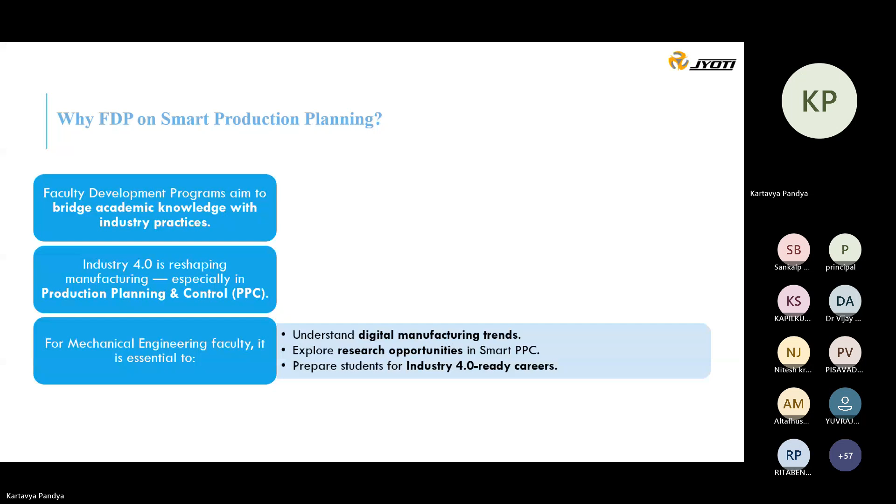Let us go to the basics. Everybody has information around what Industry 4.0 is. No need to explain much more, but it's the fourth industrial revolution. The diagram shows us different tools and techniques: IoT, cybersecurity, virtual reality, big data, autonomous robots, additive manufacturing, simulation, system integration, and cloud computing.

Think of a smartphone. It is connected to a cloud, apps, GPS, and sensors. Similarly, a smart factory connects with CNC machines, ERP, and IoT devices. Industry 4.0 aims to combine physical manufacturing with digital intelligence.

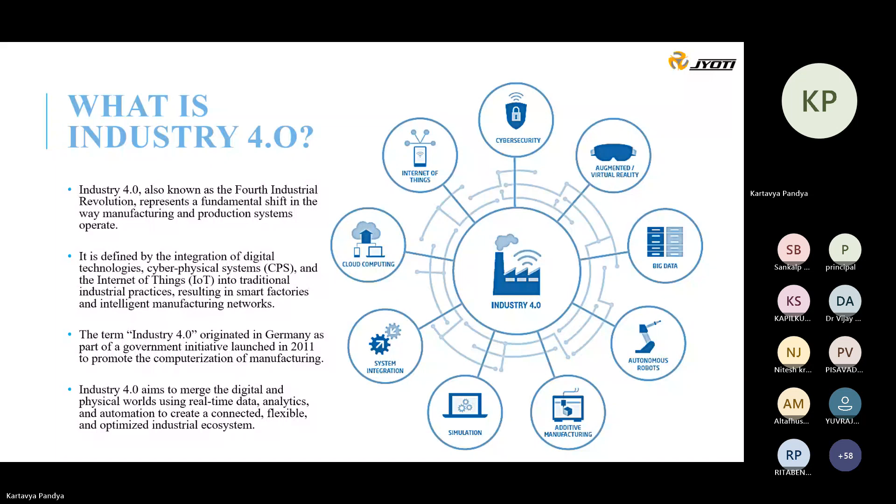Let us see something in detail. The image in front of you shows us so many things. It's an evolutionary history of industrialization and machine tools. Here we can see Industry 1.0, Industry 2.0, Industry 3.0, and 4.0. The late 18th century is the first revolution: the introduction of mechanical production facilities supported by water and steam power.

The second industrial revolution is mass production with the help of electrical power. The third revolution combines IT and electronics, allowing further automation of production processes. And nowadays, the fourth industrial revolution: connected enterprise, connected production facilities, and the Internet of Things.

As industries grow, machine tools also grow. With Industry 1.0, there was machine tool 1.0: machines were mechanically driven, manually operated. The next phase is machine tool 2.0: machines are electronically driven and numerically controlled. Then we get machine tool 3.0, CNC machine manufacturing around 1980. And nowadays we have machine tools 4.0, cyber physical machine tools, cloud based solutions.

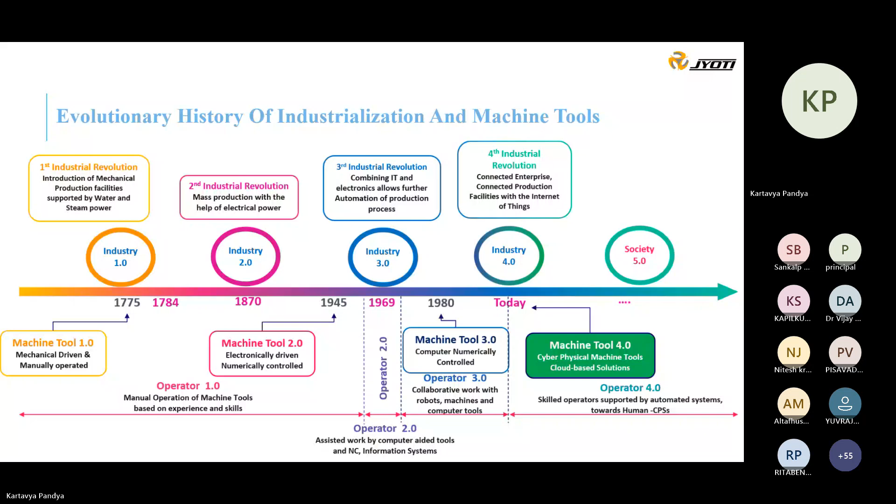Let us move to basics of production planning and control. Production planning and control refers to two separate production stages: production planning and production control. It's the process of managing resources, manpower, schedules, and other aspects of producing goods. Production planning and control is implemented by businesses to further strengthen their production processes and prevent setbacks from affecting their normal operations.

Production planning and control is mainly divided into these 8 steps that we can see on the screen: planning, routing, scheduling, loading, dispatching, expediting, inspection, and correction. Planning decides what to produce, when, and how. And control means whether it's happening as per plan or not.

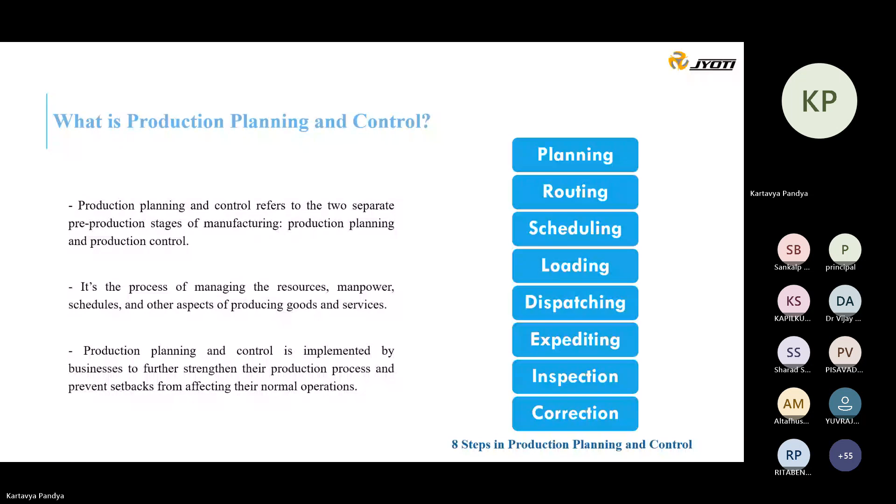So these are the 8 steps of production. It's the basics of production planning and control. Just like the industrial revolution, let us see the evolution in PPC.

Before the 1960s, planning was normally done on the basis of EOQ, economic order quantity. Before 1960, people were doing planning manually, on a paper and pen basis. In 1960, MRP came up. It's the first trigger that uses computers for planning.

Later on, in the 1980s, MRP integrated with different enterprise resource planning. So MRP converted into ERP. In the 1980s, MRP to ERP integrated a wider range of business processes beyond just manufacturing, like HR, finance, production. Every department of an enterprise is integrated.

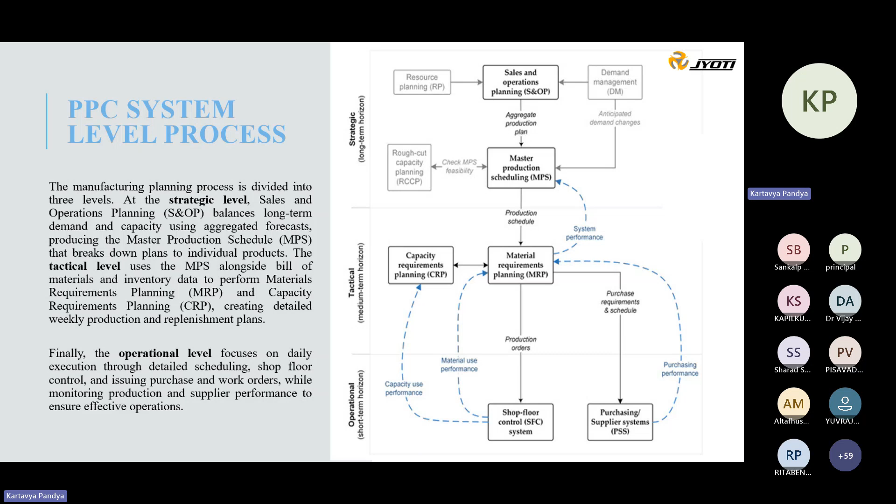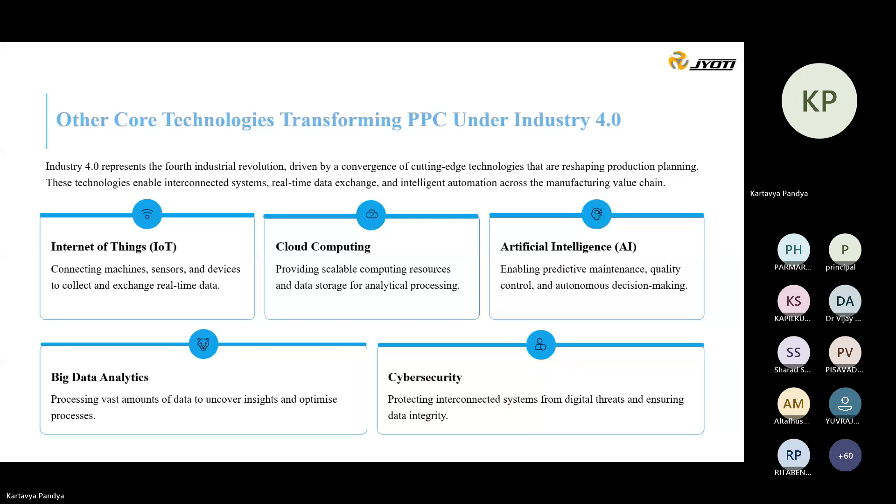In continuation of this, we need integration of these technologies to build a smart PPC. Without integration of these technologies, we cannot go for smart production planning and control. Furthermore, smart production planning and control covers APS, IoT integration, AI-driven demand forecasting, auto MRP links, and digital twin for simulation and scenario planning. We will see them one by one in detail.

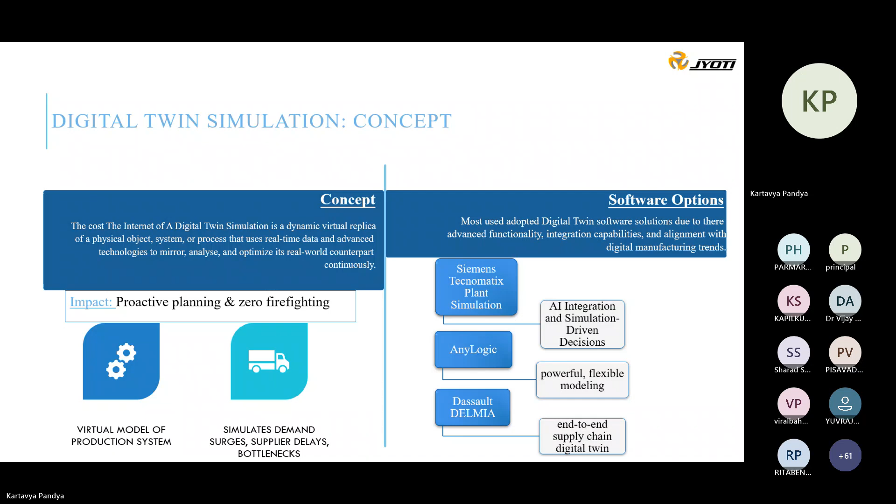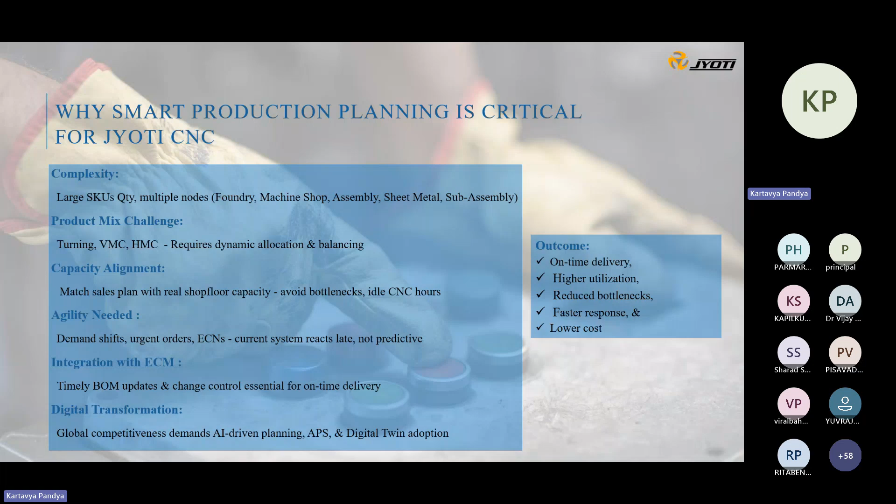Ultimately, what we need to focus on with this complexity or with these critical areas: we have to ensure on time in full, higher utilization to reduce the bottlenecks, faster response, and at lower cost. To ensure on time in full, or go for a smart PPC at Jyoti, we are using three systems.

To convert the routine scenario or standard planning to smart planning, we are using three systems. We are using SAP, we are using FINIX, and our own Industry 4.0 tool, 7sense. We are also offering the same tool to our customers.

Now, let us see 7sense by Jyoti CNC. It's an intelligent machine management. We can say a virtual machine screen for the live status. Smart navigation reduces human error. Predictive reports for data-driven decision making. It's a completely Industry 4.0 driven approach. It's directly connected with any machine; we are selling every machine with 7sense, or depending upon the customer, whether they need this option or not, but it's a part of machine integration.

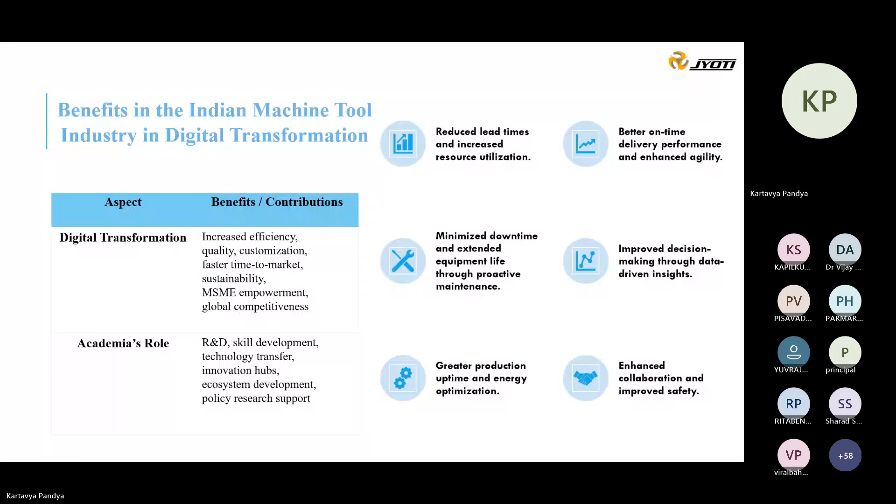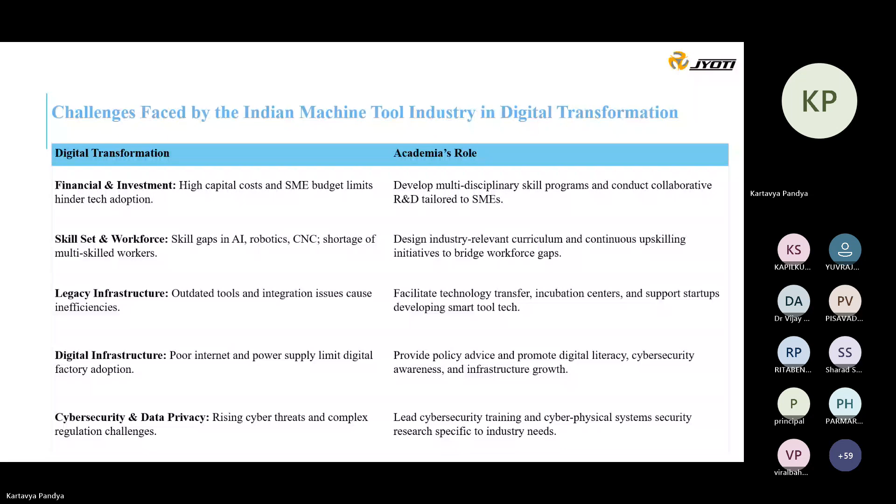Let us go for a conclusion or key takeaways. Smart production planning equals the future of manufacturing. Industry 4.0, IoT, AI, cloud, and digital twin transform PPC into a dynamic data-driven system. Indian machine tool industries need faster digital adoption to stay globally competitive. Jyoti shows how Industry 4.0 adoption improves utilization, deliveries, and efficiency.

Still, we are going further, deeper into Industry 4.0. Some projects are going on for a dark factory, for FMS, for Industry 4.0. So we are not at 100%, but we are on the way. We are improving every day. And we have concluded that the role of academics, faculties, research, and teaching integration can prepare future engineers for Industry 4.0.